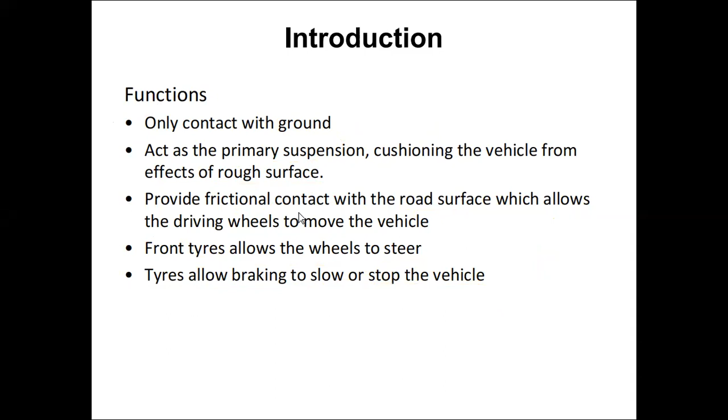Next is what desirable properties an automobile vehicle tire requires. So instead of properties, I will write it as desirable property - a small change. So the expectations are, what are the expectations from a tire?

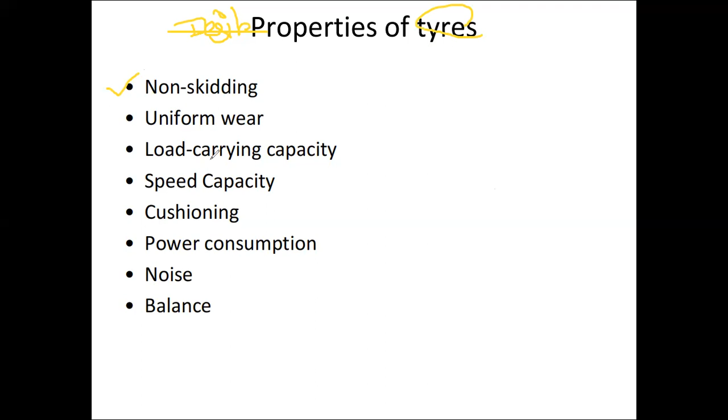First, it should be non-skidding. The tire has to play a vital role when the vehicle is moving in motion or at speed, based on what type of tread pattern is on the tire, suitably designed for specific road conditions.

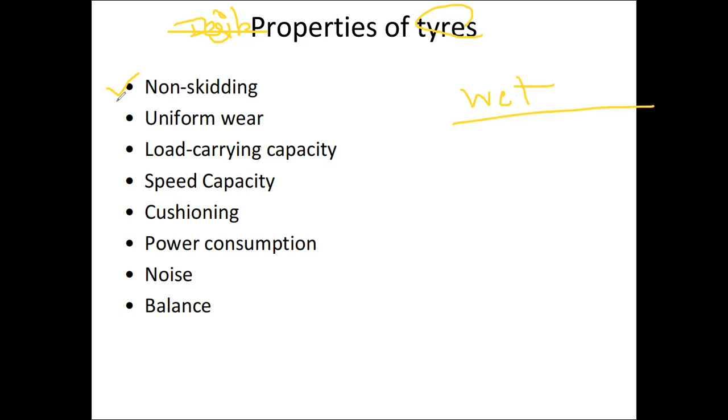It should permit at most a minimal amount of skidding, even on a wet surface. We cannot say skidding will always be 0%, but even if road conditions are wet, the tire has to overcome this and provide the non-skidding property. This is one desirable property of a tire.

Second is uniform wear. This condition means maintaining the non-skidding property as discussed. It is very essential that the wear of the tire - there are some tread patterns provided on the tires throughout its periphery - so when talking about wear of the tire, it's nothing but the wear of the tread pattern, which must be uniform throughout.

We'll discuss this again in detail. Uniform in the sense that there are tread patterns on the tire - sometimes the tire may wear at the center, or sometimes at the edges. There are specific conditions - we'll see why the tire wears at the center, or at the edges, or at the corner. There are basic reasons, but the property for a tire is that if it is wearing, it should wear uniformly throughout.

Next is load carrying capacity. Number of loads and forces are to be overcome, meaning the tire is subjected to alternating stresses - constant stress is not there for a tire. These alternating stresses occur when the tire is continuously rotating, clockwise or anti-clockwise. Over many revolutions these alternating stresses act, and the tire material should be designed so it can sustain the stresses - the load carrying capacity should be perfect.

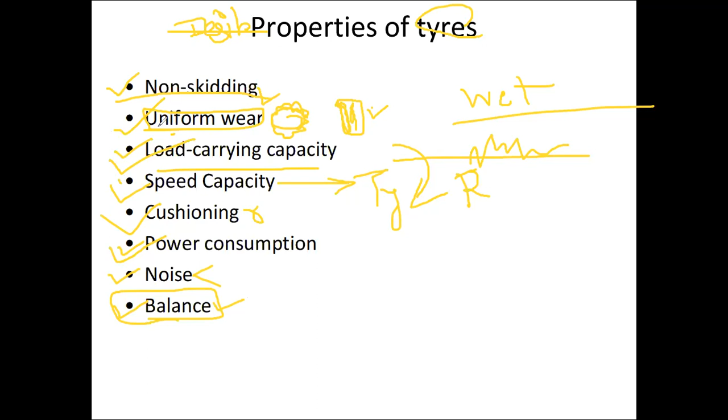So these are the basic conditions or expected properties of an automobile tire. Hope that you have understood this.

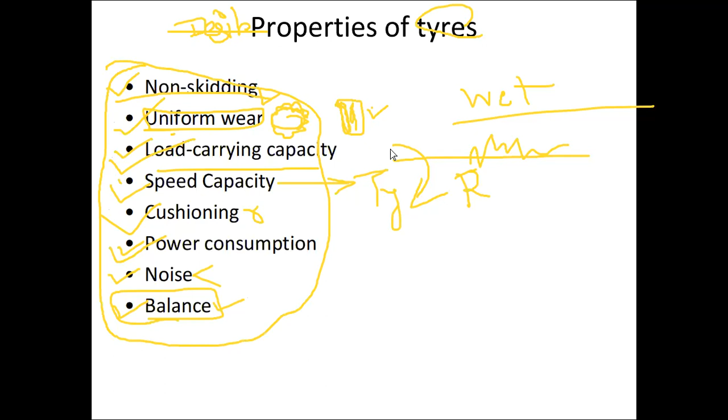The next case is the terminology related to vehicle tires. We will cover basic points since the same images will be shown in our next slide. Steel wheels are most popularly designed, very strong and cheaper. Then we have alloy wheels, spoked wheels, divided rim wheels, as discussed in our last lecture. With that, the tire also consists of...

...the plies, beads, cross plies, radial plies, different tread patterns, side walls. These are all factors related with the tires, and based on the inflation, that is how much pressurized air is to be kept inside a tire, that also matters.

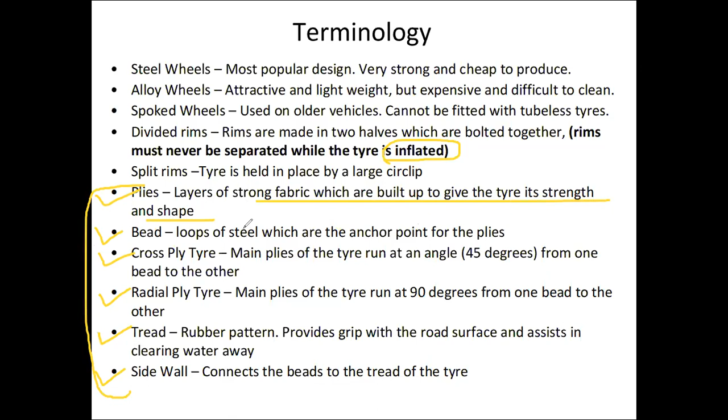Plies are nothing but the layers of strong fabric which are built up to give the tire its strength and shape. Then we have beads, which are nothing but the wiring, or loops of steel cords, which are anchor points along or at a center. A number of wire cords are provided.

Then we have cross plies. Plies are provided because the main plies of a tire run at an angle of 45 degrees from bead to bead. The plies are provided either in one direction at 45 degrees, then another set of plies likewise. So it's nothing but the lining which is provided over the tire through wiring.

Then we have radial ply. Radial ply is the same condition, except it will be provided in a straight direction, one over the other.

Then we have the tread pattern. What should be the tread pattern? It will again depend on what type of road surface the vehicle is moving on and for what purpose it is assisting, whether it has to undergo terrain conditions or flat tar road driving.

Then we have the sidewall, which connects the bead to the tread of a vehicle. Suppose this is the tire, we have a tread pattern at the bottom surface, then beads are provided at the end section, so connecting the tread and beads is nothing but the sidewalls. Those sidewalls do not undergo physical contact with the road surface, but they still have to bear the tire pressure as well as some extraordinary conditions, such as when there is sudden physical contact for various reasons. These are the basic terminologies which will be used for the tire.

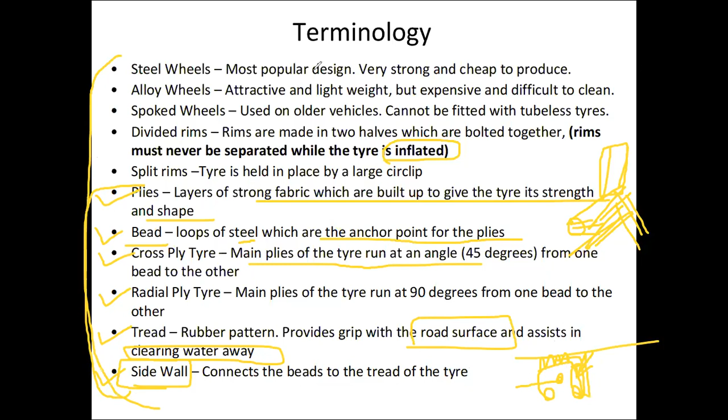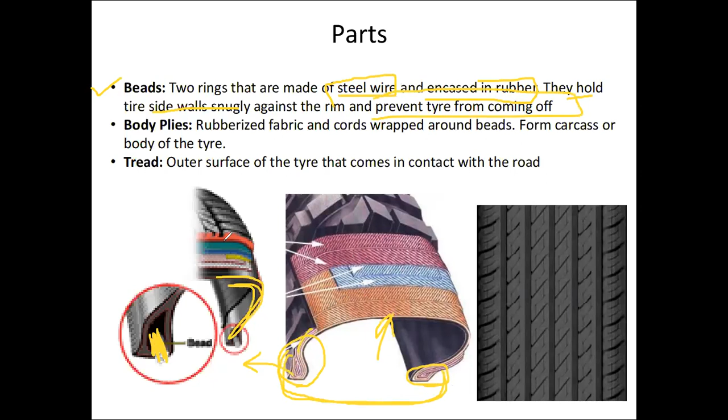These are the side walls of a tire. For this holding purpose we use the beads, held against the rim to prevent the tire coming off. These side walls are supported with that. Whenever we undergo some bumps or shocks, the tire should not come out of the wheel. That is the basic reason why we provide the beads with a number of steel wires or cords.

Then we have body plies. These are the basic plies, maybe in one direction, maybe in cross direction, maybe bias type or radial type, it will depend. Body plies are nothing but rubberized fabric and cords wrapped around the beads. Around this we have a wrapping of these plies to form the carcass, or what we can say the body of a tire. Then we have the tread pattern.

Tread pattern is nothing but this which is visible to you. The type of tread pattern also tells us where the vehicle is to be used and on what type of road surface. These are nothing but the tread patterns, the outer surface of a tire that comes in contact with the road surface. So these are the basic parts we can identify for a tire.

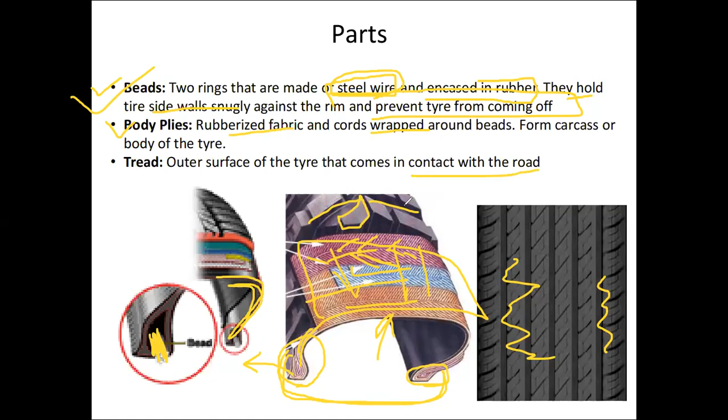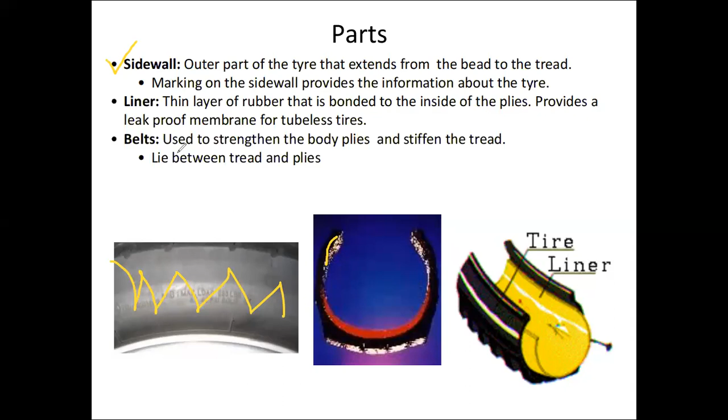Marking on the sidewall provides information about the tire, some sort of information you may have observed on different tires written over there. Then we have liners, a thin layer of rubber that is bonded inside the plies, and provides a leak proof membrane for tubeless tires as well. For tubeless tires we have different extra lining provided which will retain the air pressure within the tire.

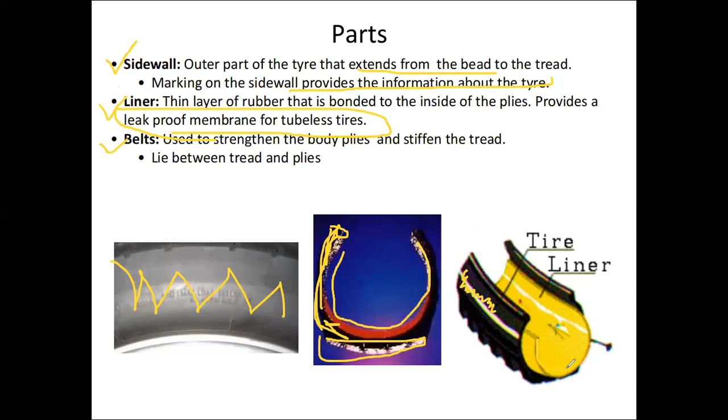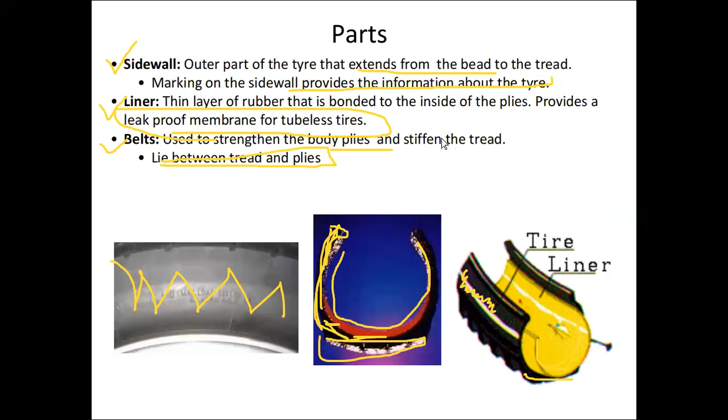Then we have different types of belts used, layers of different cords used as strength for the body plies and to stiffen the tread. The tread pattern is such that it will not be moved, or we can say it lies between the tread and the plies. So between this we have these plies. As for what type of material, no need to go in detail with all types of compounds, how this rubber is manufactured. I think you may have studied this in your 12th standard as well, so no need to go into detail with the types of materials used.

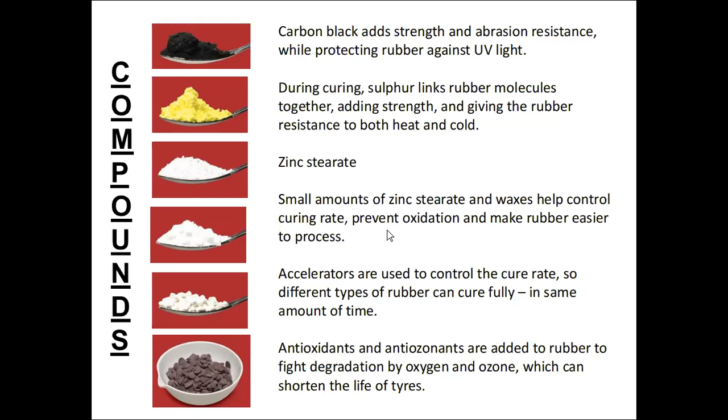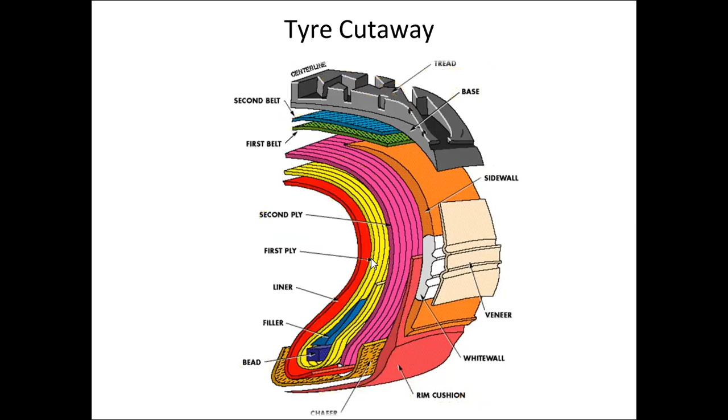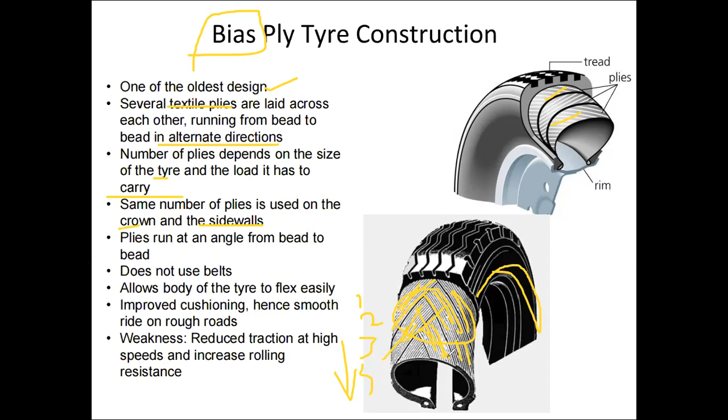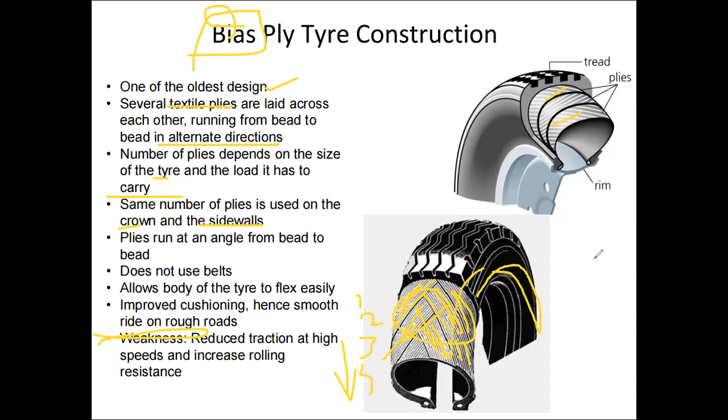Then we can say the same number of plies is used for a crown or sidewall, then we apply an angle, that is this angle. We do not use a belt in bias plies. Whereas this reduces traction at higher speeds and increases rolling resistance, which is the main drawback for a bias type of vehicle or tire.

Then next is belted type. In the earlier case we were not having belts, but here we are having belts. Belts are nothing but crisscrossed number of plies. You can have a good example over here - whenever you are using the bias type of plies, we don't have perfect contact with the road surface of the treads. So that's why bias ply tires have belts added to increase tread stiffness.

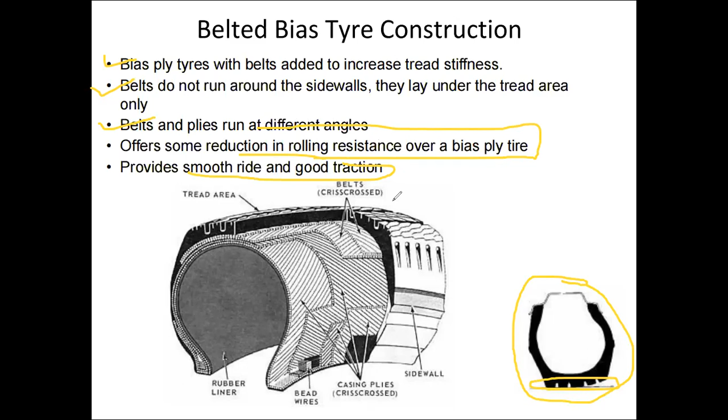Then we have belts which do not run around the sidewalls, and belts and plies run at different angles. Again, it offers some reduction in rolling resistance over bias plies. So compared to the earlier case, its rolling resistance is reduced and it provides smooth and good traction. So the earlier case was some of the older type, but this case provides better conditions.

Nowadays what we are using is the radial plies. These look like this - a number of layers in a radial fashion will be provided, giving good strength along the tread pattern itself. The same thing is mentioned over there, but along the tire sidewall we may get some sort of thicker condition.

So I will read out the things. Plies run straight across from bead to bead, that is this one. Then we have very flexible sidewalls as I told you, that is a stiff tread but it gives a stable footprint. Then we have a carcass ply formed by textile arcs, running from bead to the other, with each ply at an angle of 90 degrees, that is perfectly right angle.

Then at the top of the tire we have a crown, that is the tread pattern, and the tread here will have some sort of reinforced metal wire which will provide less puncturing of the vehicle. Then the crown ply is laid on top of the other, overlapping at an angle that determines the type of tire. So this is the basic condition.

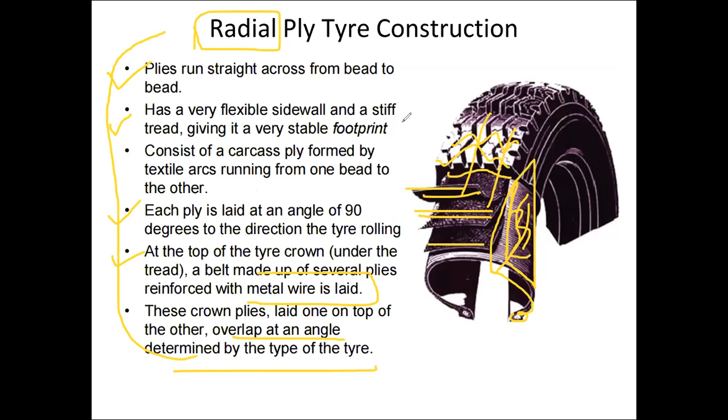Now, since this radial plies are used number of times, what are the basic advantages? Obviously, the disadvantages of the earlier cases will be overcome over here.

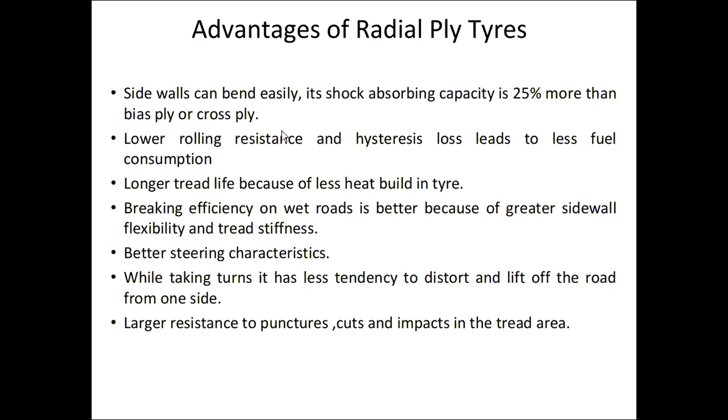Side walls can bend, absorbing capacity increases, and we get lower rolling resistance and hysteresis loss as compared to the bias type, plus longer tread life since we have a crown under the tread pattern. Then we have braking efficiency on wet roads, better steering characteristics, less tendency to distort while taking turns, and larger resistance to puncture, as I said earlier, impacting the tread area. These are the basic important advantages related to radial tires.

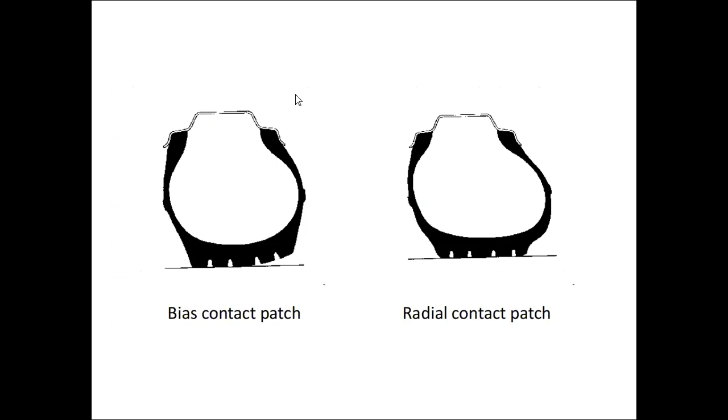Now, when you observe the condition for a bias type, or belted bias, or only bias type, what exactly is the contact point? When you observe contact of a bias type with the road surface, there may be some sort of angle made with the contact. So what will happen due to this? There will be maximum wear and tear at these conditions.

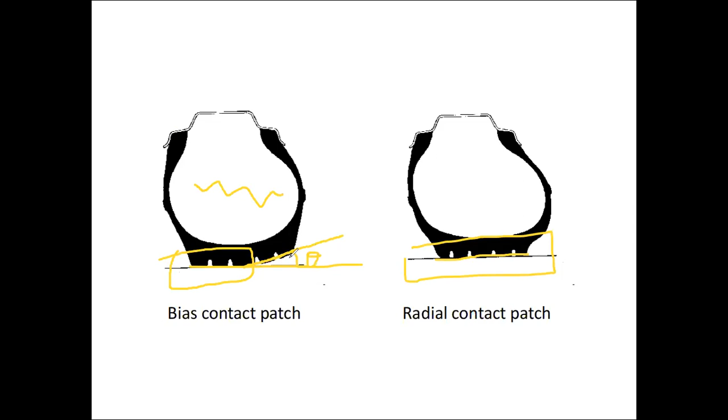But if you compare it with the radial tire, we have perfect physical contact. Though the air pressure within the tire changes, there will be a change or lifting of the tread pattern. But in this case, if we have a change in air pressure or load of the vehicle, the physical contact with the tread pattern will not change. So this is the basic advantage of a radial type.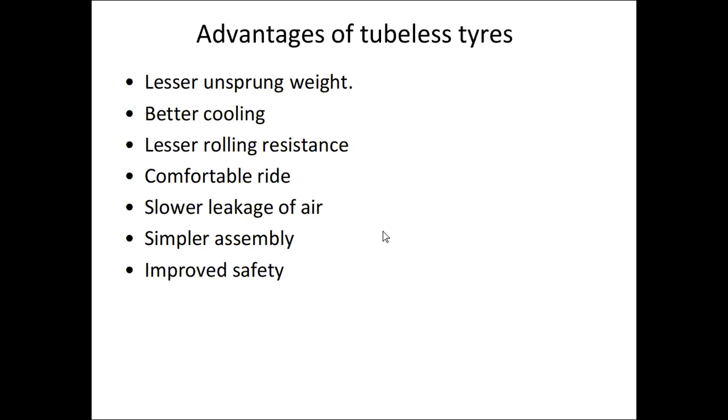Now representation of a tire is a very important thing, how the tire is represented. Most probably, or usually, we have some sort of information provided on the side walls of a tire. Now what exactly is this? If it's visible over here, it's well and good; if not, I will show you another slide for this. So some sort of information is written over there - what exactly does it indicate?

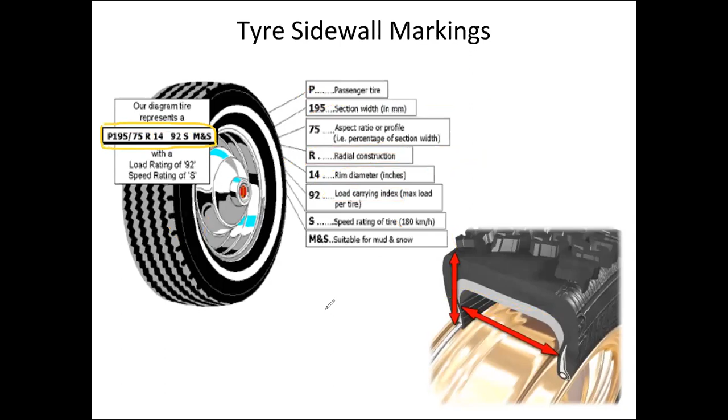Then we have load carrying capacity index, maybe 92 or 85, somewhat based on the type of load carrying capacity. Then we have speed rating, which will indicate 180 kilometer per hour condition for this tire. Different tires will have different ratings. And the last one indicates whether it's suitable for tar roads, mud roads, or snow roads, which will again change. These are the basic important things to understand from the information provided on a tire.

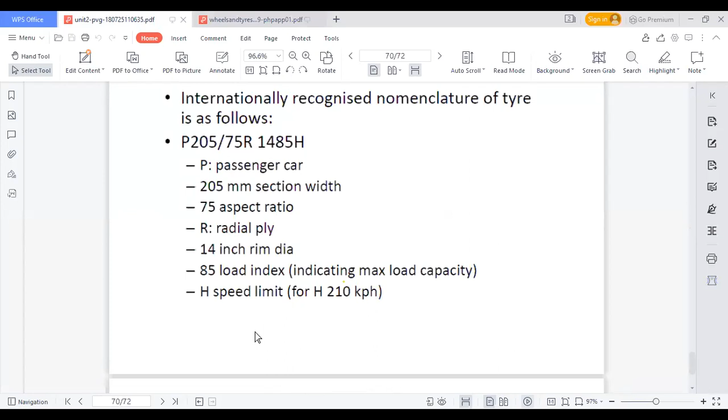Let me show you a second slide with these parameters. P20575 R1485H, where P indicates passenger car, 205 is the section width. Then we have aspect ratio, radial type of construction (radial ply), the rim diameter, load index, and the speed limit. This is related to the notations for a wheel.

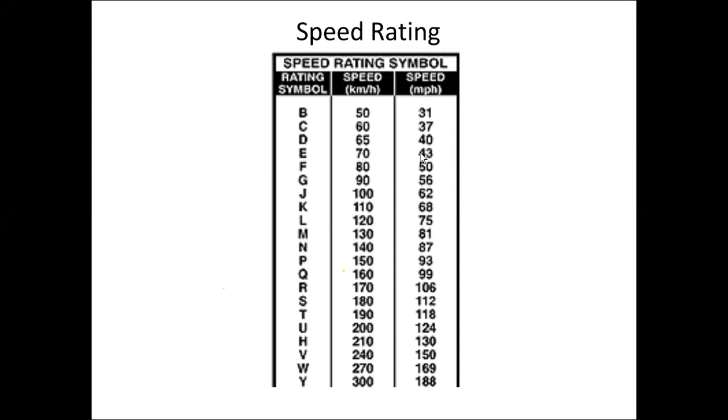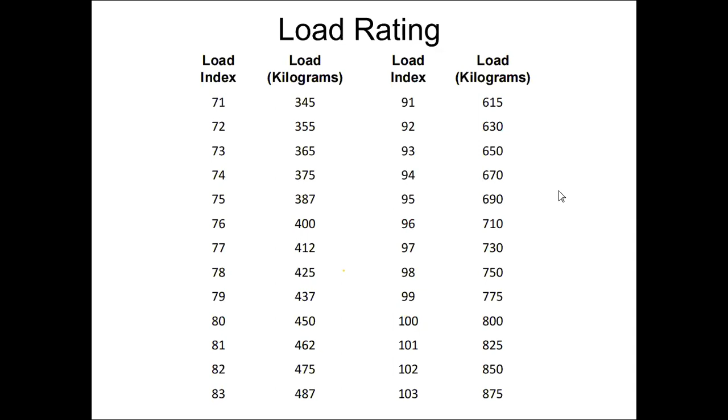Now, the symbols used for different speed ratings. I'm trying to complete this wheel topic within one lecture, that's why it may seem somewhat speedy, but I have to complete it. Different ratings are provided, either in kilometer per hour or miles per hour. Then we have load carrying capacity based on the load index. If a tire has load index 71 mentioned, that means its kilogram capacity is 345, and likewise tire capacity will change based on this load rating.

Coming towards the tread pattern, there are different tread patterns. Snow tires have a different type of tread. Nowadays tread patterns are varying, providing lesser friction with better gripping, which is the basic challenge for tire manufacturers. So these are all types of tread patterns, for summer conditions, all weather conditions, wet weather, all terrain, or mud type of conditions. No need to go in details.

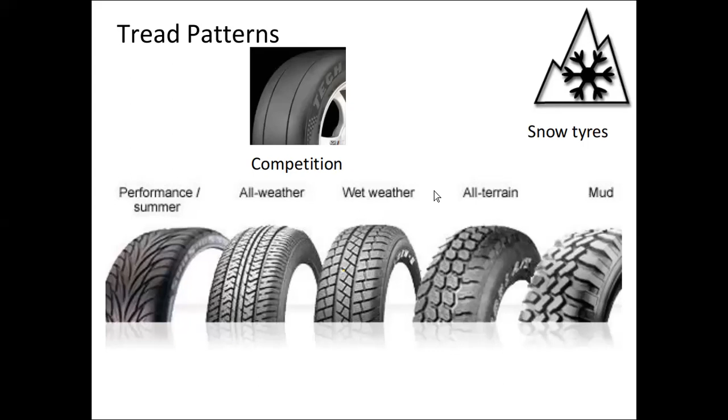Moving on to different problems of tires: we have feathering, cupping, and one edge wear. Feathering is due to improper alignment. Cupping is due to improper balancing or steering. And one edge wear means the wearing of one side edge is taking place, due to improper alignment of camber angle. We'll discuss caster and camber angle in detail when we come to steering mechanisms and the steering topic.

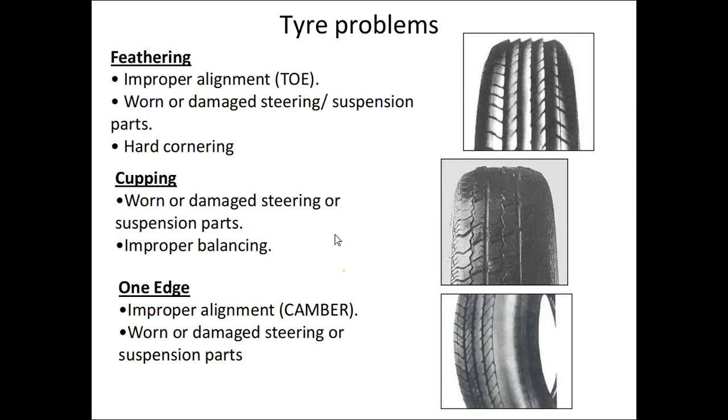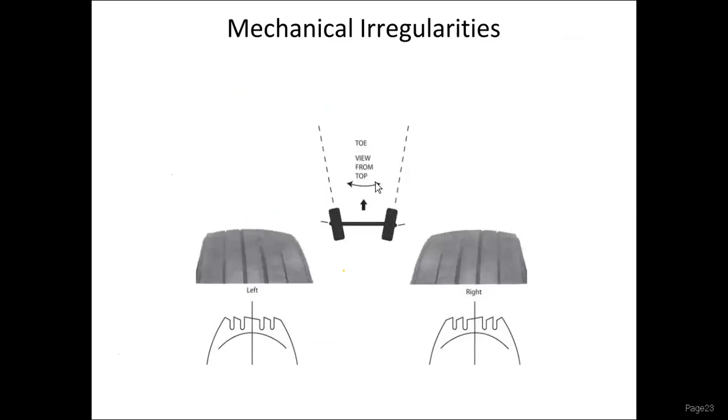Hope you understood the basic parameters of tires and their materials. Based on the irregularities created, that is toe-in toe-out parameters, these are mechanical irregularities. Then based on caster and camber angles, we have excessive wear either from inside or outside.

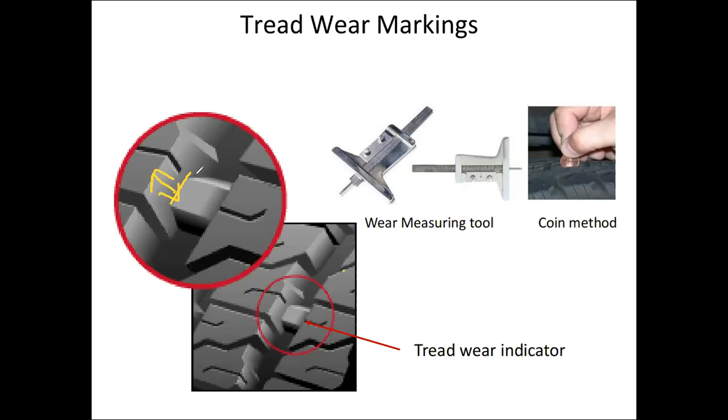If you've observed, for a new tire we have some extra tread pattern inside the tire grooves. This is most probably used for measuring or indicating the wear of a tire. We may also use the coin method, or some measuring devices, but this represents that whenever the tread pattern wears down to this height, it's an indication that you should change the tire, or it may provide hazards to us. So these are the basics of tires.

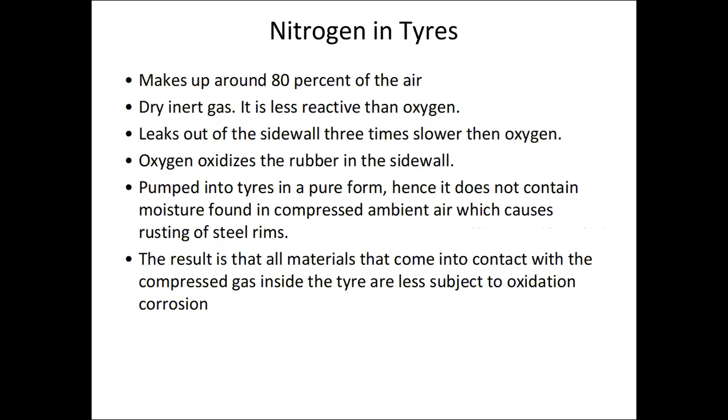Now, what exactly is filled inside the tire? You may have air pressure or nitrogen, and there are some advantages related to nitrogen tires. Since it's an inert gas, it provides cooling in summer type conditions, and the air pressure almost does not change when you fill nitrogen inside it. There are a few more advantages as well.

Then we have special types of tires, used for different conditions. I think we've almost completed this, no need to go into detail with these topics again.

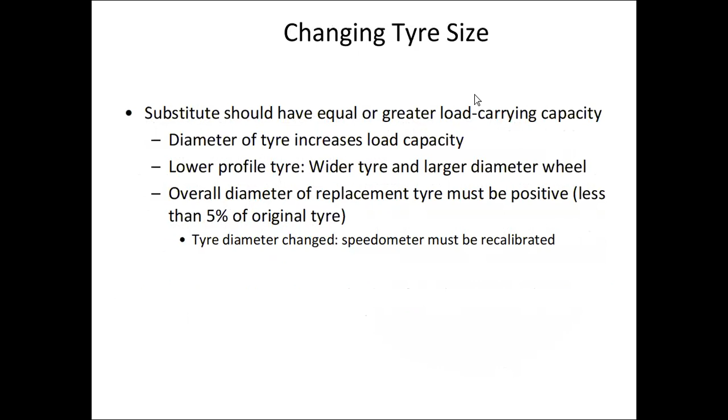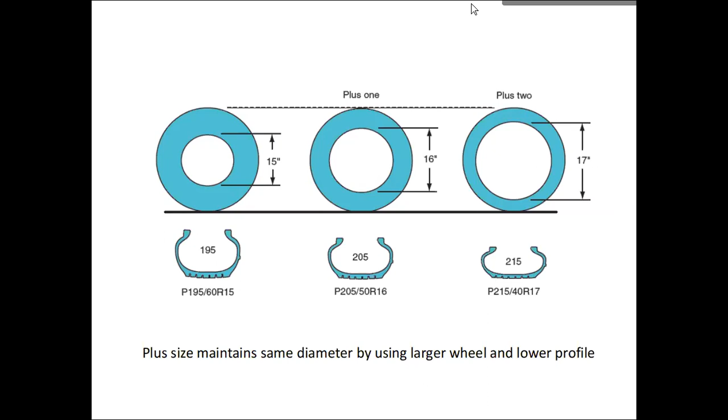These are the basic representations: R14, R16, R17, R18, based on the inner dimension. When you change the tire, the tire manufacturer or retailer will ask what type of tire you require, whether R15, R14, and so on. Usually cars have R14, R15 patterns, while sports cars and SUVs require R17, R16 as well. So these are the basic parameters, and this was all about your tire and its specifications.